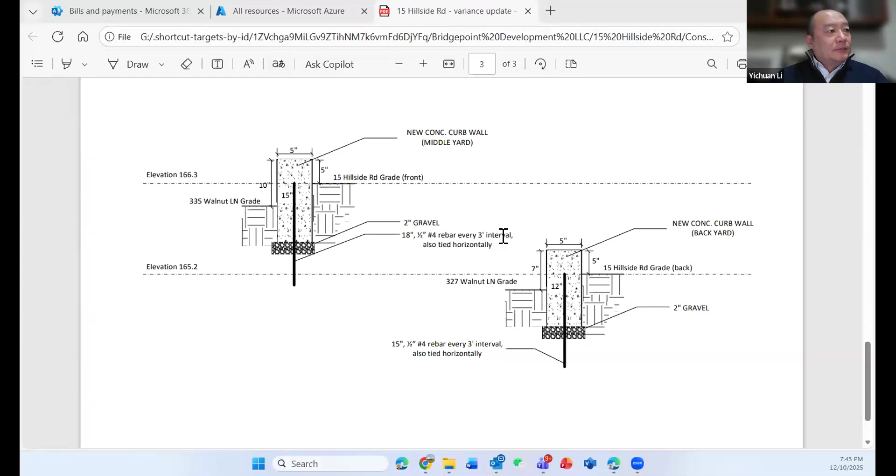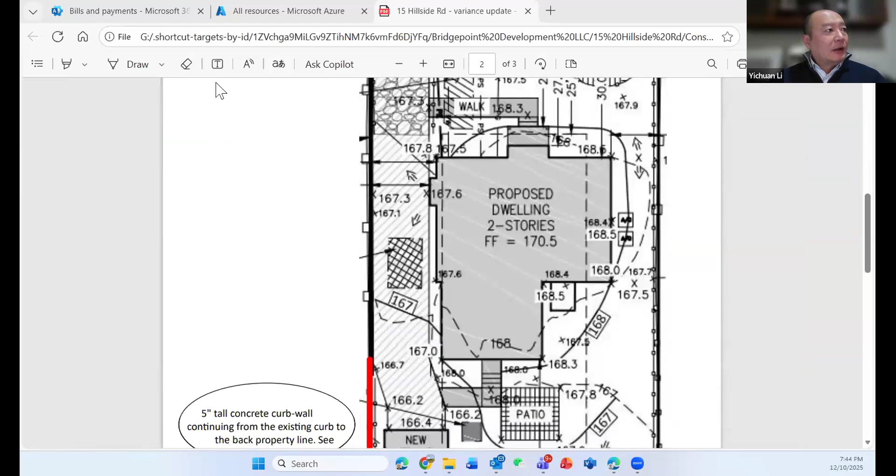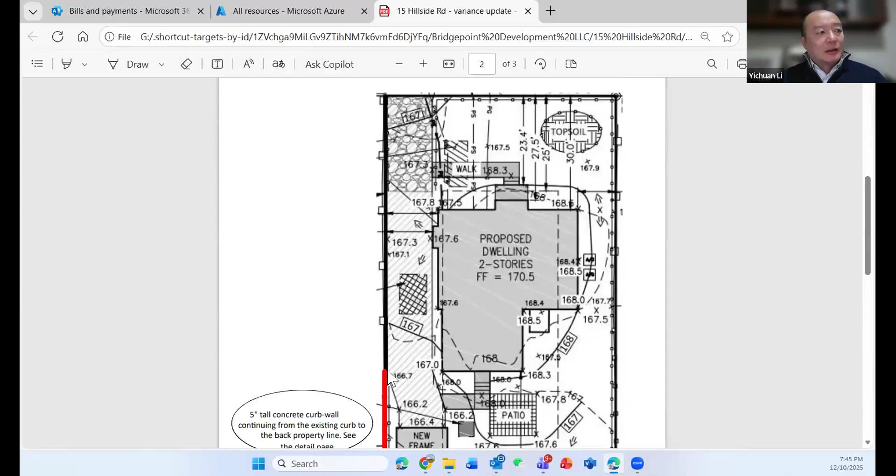So as you can see, I'm going to show you this existing condition. Starting from here towards the property line in the front, there's already an existing curb wall from the previous owners. What I propose is to extend this concrete curb wall all the way to the back of the property line, so it divides the two properties and contains the stormwater in my property, in my backyard. If you look at this survey, this red line represents the new curb wall I'm going to install, starting in the middle of the yard. The front black line is the existing curb wall, and I'm going to extend it all the way to the back.

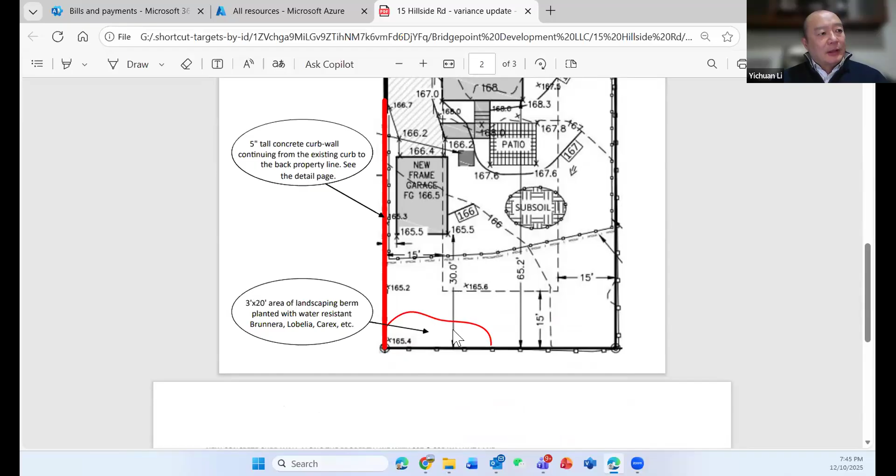I also took the recommendation from the township site engineer, so I'm going to install a 3 foot by 20 foot area of landscaping berm. This berm will have water-loving plants so the water can also be absorbed by the plants in the back, becoming a landscaping feature, so the water will contain within my backyard. This is the detailed design: we're going to put about a 15-inch tall concrete wall, about half buried into the ground, with a rebar stick every 3 feet into the soil so it can hold the concrete wall. That's the engineer design, and we sent it to the neighbor, and the neighbor seems to like the idea.

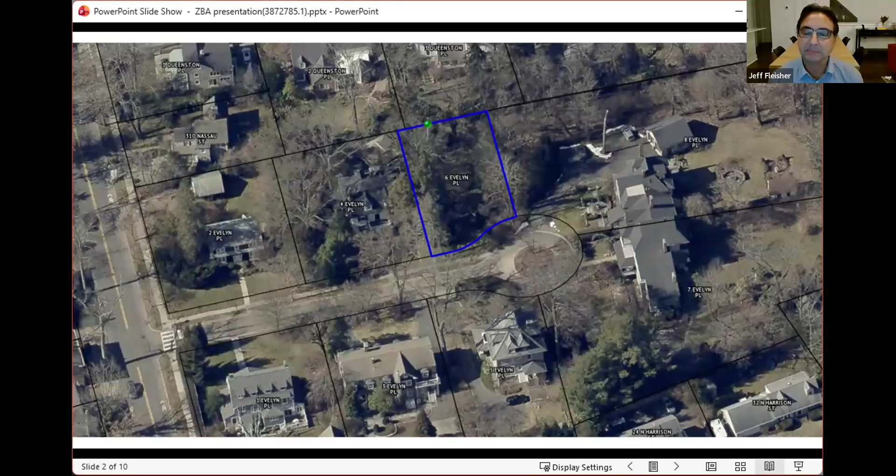If I could share my screen, we have one exhibit of slides that we'd like to have marked as our one exhibit this evening. Sure. All right, hopefully that was successful. Jeff, going to slide 2. In blue, that is 6 Evelyn Place that we'll be talking about here tonight. That's correct, yes. Let me go now to slide 3.

Maybe you could just orient. This is a revised map here, but let's talk for a second about how we're used to describing or calculating prevailing setbacks, and ultimately what you're used to with the plus or minus.

However, what happened here? So maybe starting at 27 and going up, Evelyn, let's just talk through it. I think we've marked the setbacks of the 3 homes that count towards calculating the prevailing setback. Is that what we have here?

That's correct. Yes. So starting on the corner, we've got the orange line that shows where the setback is that was calculated by the municipality for us, next door, where that was calculated. And then at the end, interestingly, there is a duplex, and half of the duplex counts as being on our side of the street. And the front of that is actually the 3rd prevailing setback.

That's correct. Yes. And then for our lot that we'll be talking about, 6 Evelyn Place, we've actually shaded in what it means to be, in this case, 33 feet from the lot line, which is actually a curved and undulating kind of ribbon. Is that right? Yes, due to the circle at the end of the street.

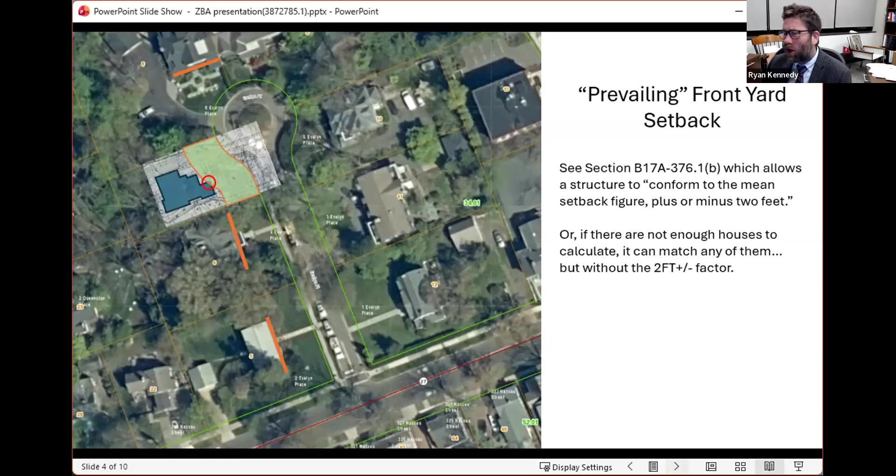So zooming in again here on slide 5. Here we have, in gray at the bottom, that is the footprint of the home. Yes. And then green is that front yard area that, unfortunately, the way the home was ultimately sited, cuts through a very small portion of a part of that front of the building. Yes, that's the 33-foot setback.

Now, I noticed that the other part of the front of the house is actually set behind that 33 feet. So actually, could this part of the home have been built closer to the street? Yes, you could have filled in that triangle there.

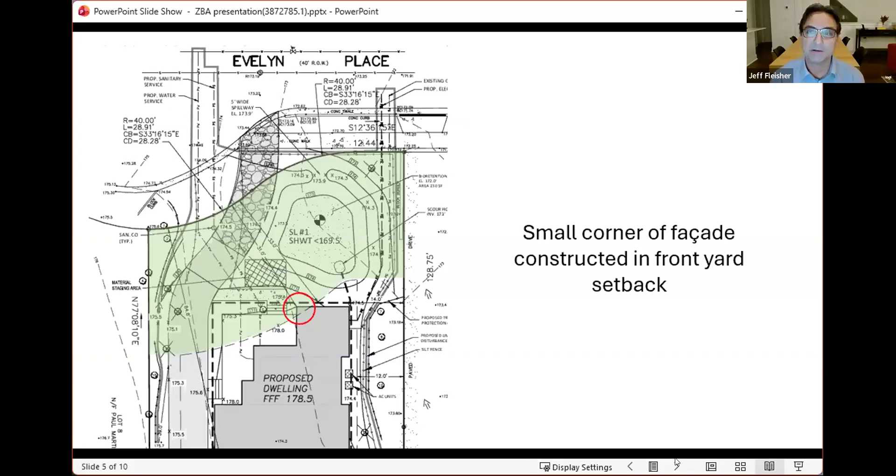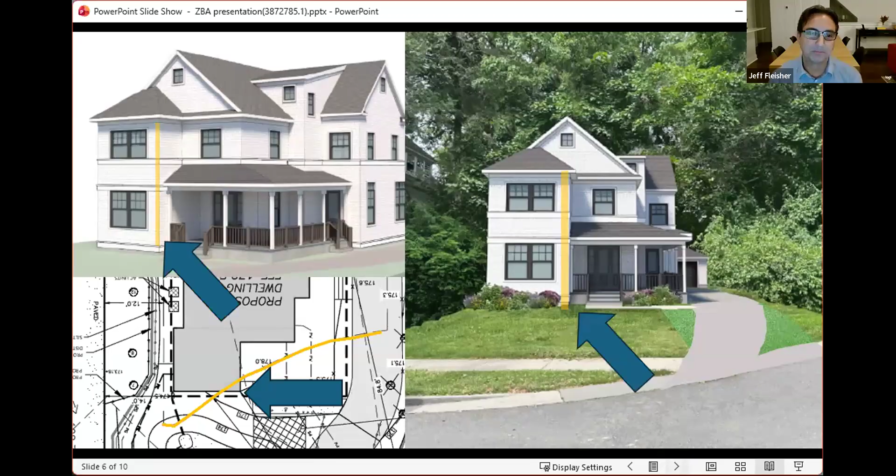That's correct. Moving to slide 7 here. Again, we've got a photo on the right. Now that's current, but ultimately that's the state of the building once the applicant realized what had happened and came to the town to ask for the variance.

But that is essentially what has been built. Maybe you could just briefly say, if we were to alter the front, what that might mean, what you'd have to do. Well, from the foundation up, you'd have to cut that corner as well as the roof.

And the type of foundation that this is, maybe you could describe that a little bit, how this was done. It's a prefabricated foundation that's brought in and placed on site. So it would have to be pulled out and remanufactured at a shorter distance.

And looking on the left, where the map shows what is into that front yard, it looks like that front porch is in the front yard, but that's there because front porches are meant to be and permitted to extend into the front yard setback?

Yes, they are. So, put another way, the way you designed the house was to follow that line and actually make the porch appear more prominent. But ultimately, that is permitted, while that sliver of the front part of the first and second floor room is not. Right, the house itself is not allowed.

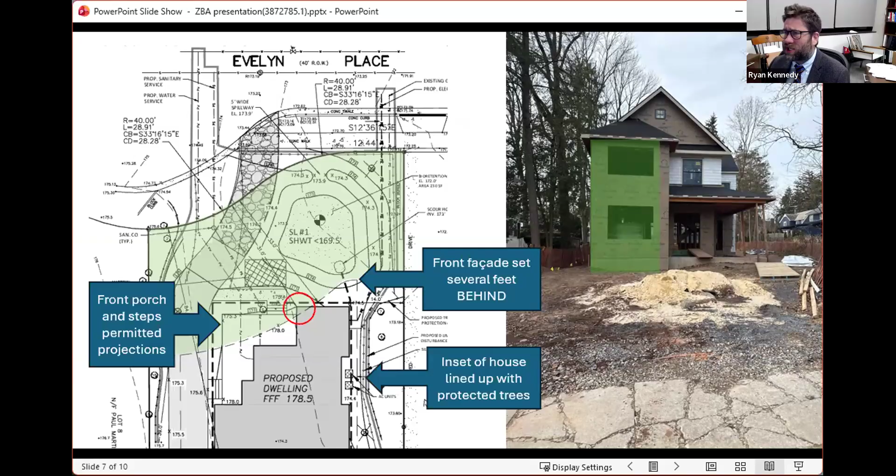Oh, definitely, yes. Moving to slide 8, you can see a little more of those trees that were kind of designed around in siting the home. Maybe speak a little about the work that went into protecting those roots and carving around them. I've heard the term often but never really seen it in action—essentially air spades were used to make sure the roots were protected, as opposed to trenching or cutting them. Yes, they took great care, and I know they worked even with the neighbor to make sure they saved as much of the root system as possible.

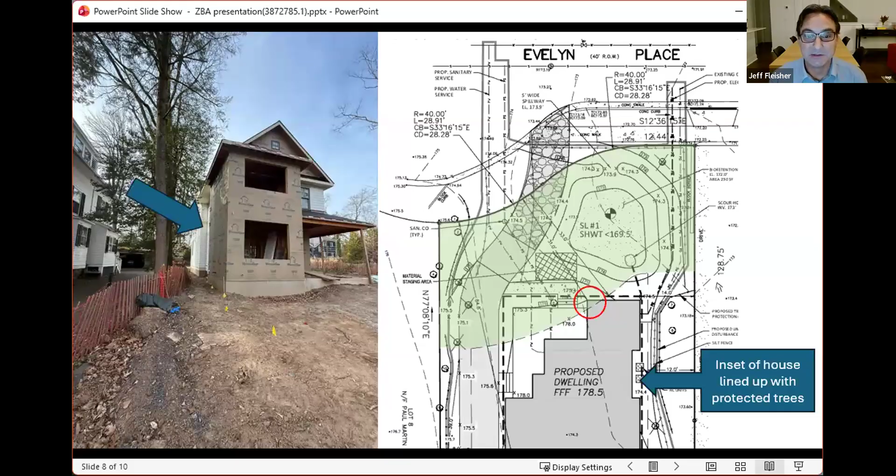Here's another view, kind of towards that corner, but again you can see what's built. That 2 feet we're talking about is that highlighted corner of the frontage of that portion of the house, is that right? That's right.

Well, I don't know if anyone has any other questions for the architect other than a brief summary. That is our intended direct testimony. I'd like to summarize briefly before we finish up, but I'm happy to yield to any questions. Thank you, Mr. Kennedy. Any questions by board members?

I have a question. Exactly how big is that corner—is it a foot? Well, the 2 legs would be about 2 feet each, the 2 legs of the triangle, if that's what you're referring to. Yeah, I think so.

All right, thank you. Any other questions? Steve, I have a question. Sure, Donna. The trees you're talking about, gentlemen—are these trees on your property or on the neighbor's property? They're on this property, but very close to the property line. Okay.

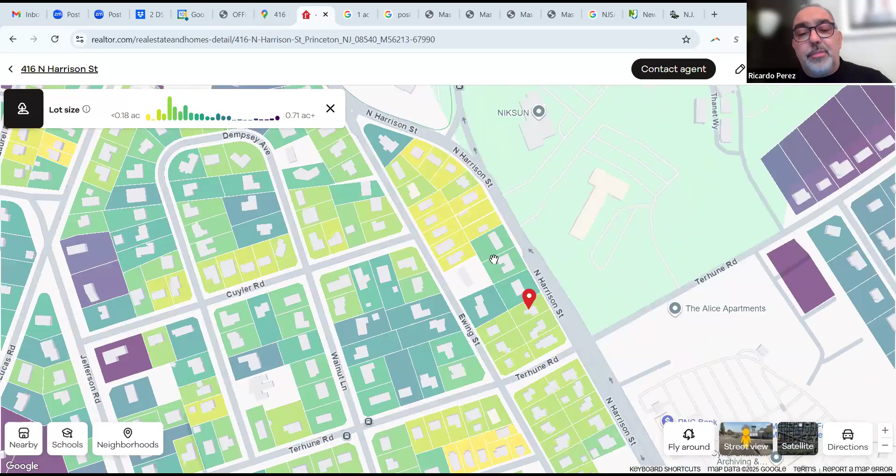Okay, very good. Thank you. Okay, and this is just to show general location of the property in question, which is here with the red dot. This is 416 North Harrison Street. You can see the yellow properties at the bottom of the sheet here are similar size lots, about 75 feet. They're all undersized. The lots a few of the lots to the north of us are slightly larger than 85 feet. But as you can see from the yellow on the map, most of the lots are 75 feet or smaller even. These get smaller at this end. So we're surrounded by a lot of small lots in this area.

My next exhibit here, this is Crest Engineering's drawing that was submitted for approval. It is dated 4/25, and I'll start with their existing drawing just to give you a little understanding of the existing site. This is the existing property in question. What we're proposing to do is take out the carport and the 1-car garage and add an addition on this end. And then we don't have a new slide, Ricardo.

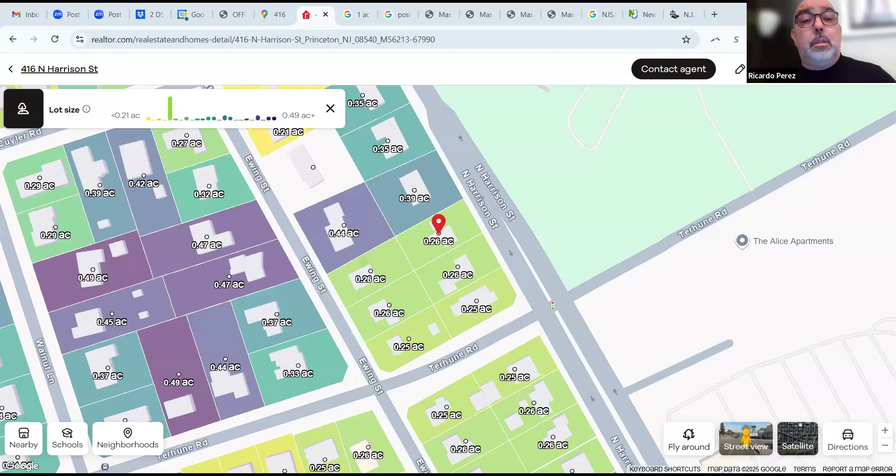Oh, you don't see it. I'm sorry, yeah. Let me stop that one and start the new one. I'm sorry, I don't have them in order. That's all right. Okay, is this one being shared now? No, not yet, not yet.

Here we go. Okay, maybe you have the slide now? Okay, yes, yes, all right.

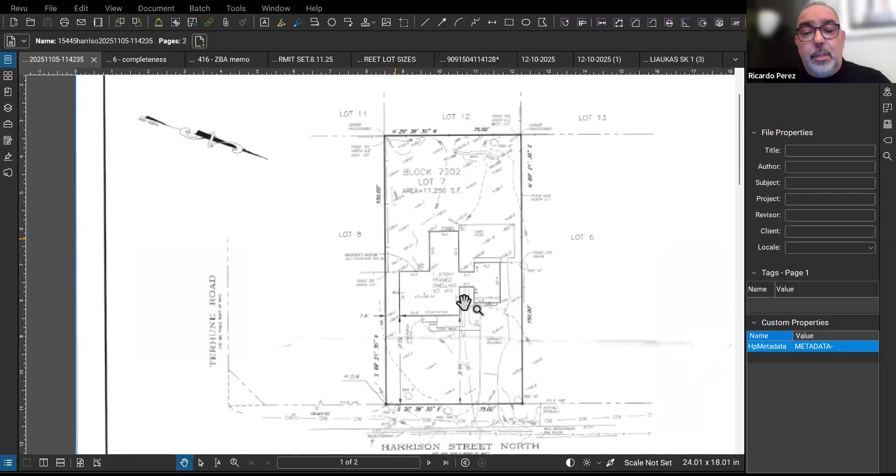This is the existing site plan as submitted from Crest Engineering, showing the existing house and footprint. We're not changing the footprint except for knocking down the one-car garage. The vestibule is coming out, and there's a new addition in this corner. This is the existing property, and we're maintaining the front yard line, so there's no change for the new house.

Here's the proposed house with an addition. This is the existing footprint, although we're rebuilding it. This is the additional footprint, which is within the setback, so no variances are required there. And this is the overall site plan.

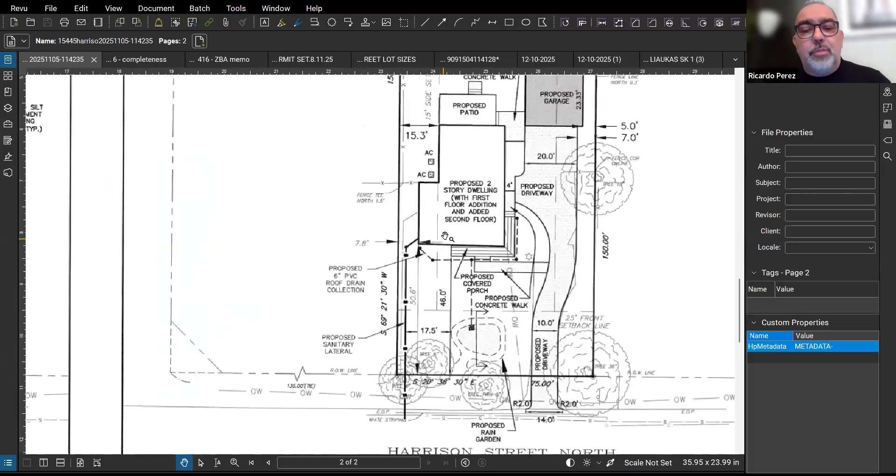We're here today for one simple thing. We have a non-conforming 75-foot lot where 85 feet is required, so our frontage and required widths are both short. There are no other variances, with the exception of the existing condition of this part of the building, which is encroaching on the side yard. That's an existing part of the building being maintained. The rest of the construction will be new, and we're here because it's a non-conforming lot.

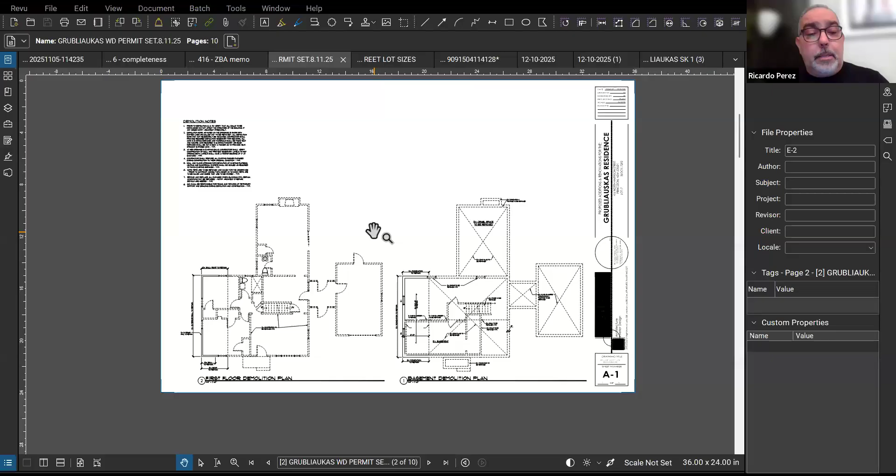The building itself—I'm going to switch drawings here to my third exhibit. Got it, okay, okay. So here's our demolition drawing, so you can see what we're taking away from the house. The reason we decided to take away most of the basement is because it's structurally unsound at the moment.

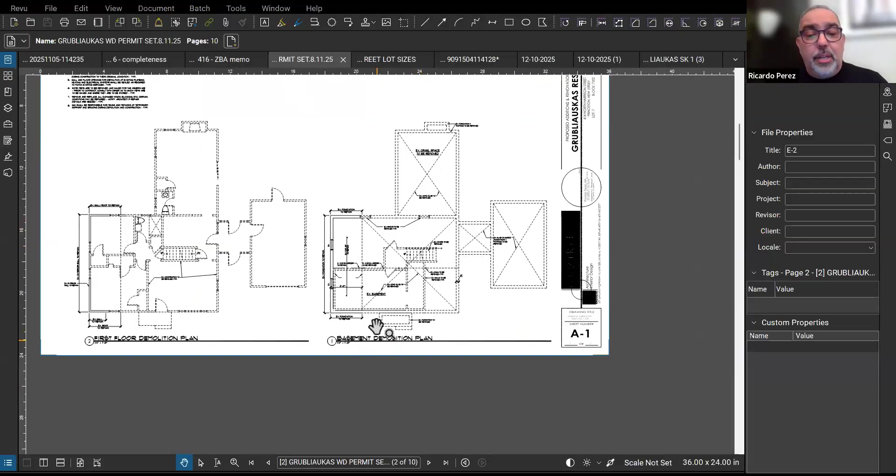It's leaking water. This home was built in 1950, and the ground on the outside was not well maintained, so there's a lot of damage to the existing foundation. We were attempting to repair it, but it was not cost effective, so we were hoping to replace it. In replacing it, we're going to go a little bit deeper because the current basement height is only about 6 foot, which is very shallow and doesn't meet occupancy requirements for today's modern homes.

The new home, just to show you the floor plan, is a modest home, about 2,500 square feet. You can see the front elevation facing Harrison here—it's in keeping with the rest of the neighborhood. This is the existing portion of the building. We're hoping to replace the foundation under it because it's also in bad shape, but that's the existing portion.

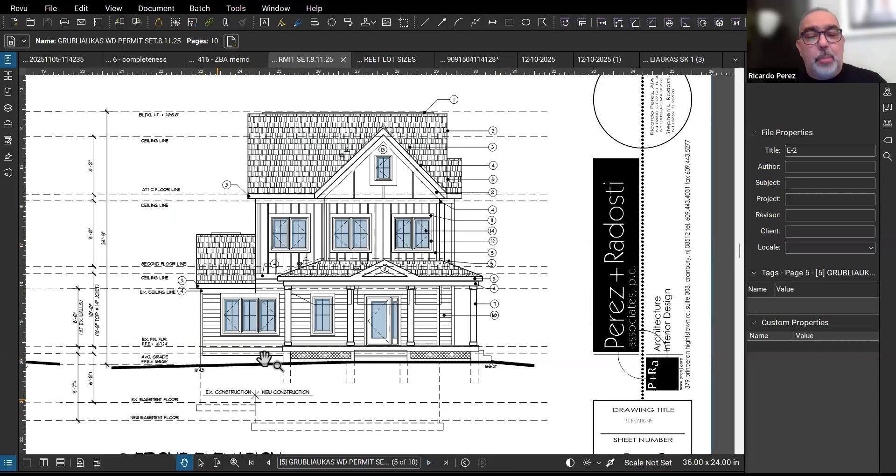So in short, this is basically a lot that's too narrow for the existing conditions. Had we not been building a new home, we would not be before this board. There are no other variances required for this property that we're aware of at this moment.

The variance will not harm the public good or zoning plan in any way whatsoever, and is the only necessary relief for this project. It is also part of the Princeton master plan to reduce the cost of development and increase investment by streamlining review, permitting, and approval procedures—exactly what we're doing here tonight. This would be in keeping with the master plan, as well as items M and possibly G of the Municipal Land Use Law. G is to provide sufficient space in appropriate locations for a variety of residential, commercial, industrial uses, and open spaces, both public and private. M is to encourage coordination of the various public and private procedures and activities shaping land development, with a view of lessening the cost of such development and the more efficient use of land.

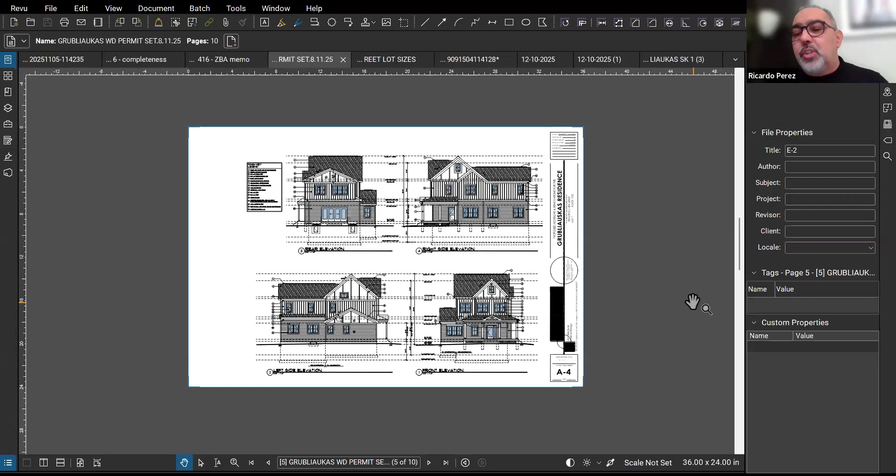So hopefully this is your easiest application of the evening. Let's see if I have anything else to say here—I had a lot more drawings and exhibits, but I think this is a pretty simple application, and I'll take any questions from the board or anybody.

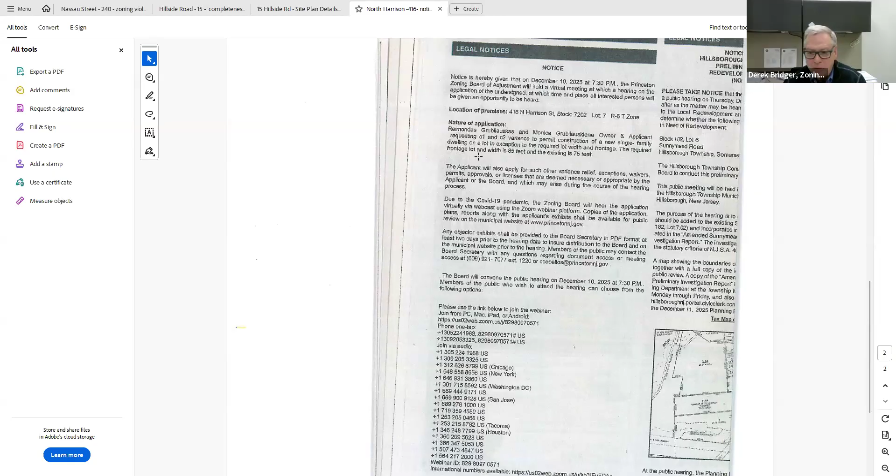That's correct, it turned into a new home, and that's why we're at the variance meeting. Well, we've got the notice on the screen, and yes, they did ask for any other variance relief deemed necessary or appropriate by the applicant or the board, which may arise during the course of the hearing process.

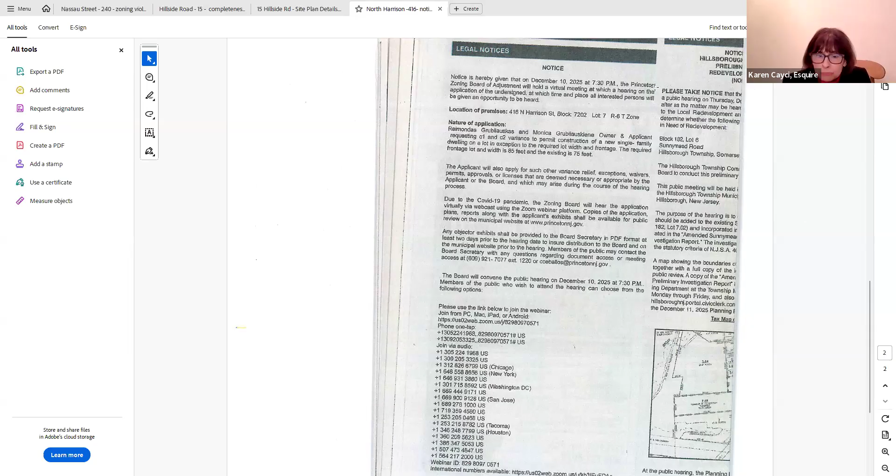So I guess the only question is for the neighboring property. Now there would be an encroachment into their side yard, and they didn't get notice of it. So there's a question of whether technically the board could go ahead and grant it, balanced with, does the board think it would have been appropriate for the neighbors to know about that, that there was going to be an encroachment in the side yard? I think before we decide, Karen and Derek have to tell us whether we could do it.

I mean, it would have been cleaner if they'd noticed for it. At the end of the day, there'll be excavation 7 feet from the property line versus the 15-foot foundation they're going to dig now. So, it's a tough call.

Okay, well, let's move on. Eve, we can come back to that in the executive conversations. See if there's anyone from the public, maybe someone who's the neighbor. I don't know if they're here. Mr. Perez, do you want to give a summary before we go to the public portion?

Yeah, I kind of did give my summary as far as the lot being an existing non-conforming width and frontage. There's an existing side yard encroachment that's grandfathered in. We are asking for relief of the 85-foot requirement in lieu of the existing 75-foot on the lot. The variance will not harm the public good or the zoning plan, if given. It is the only necessary relief for this project.